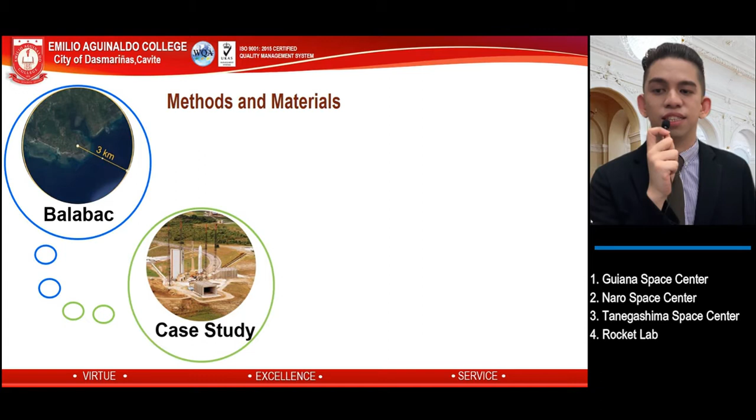The second part involved the case analysis of 8 existing spaceports, such as Guiana, Naro, and Tanegashima Space Centers, New Zealand's Rocket Lab, Baikonur and Plesetsk Cosmodromes, Pacific Spaceport Complex, and the famous Cape Canaveral Spaceport.

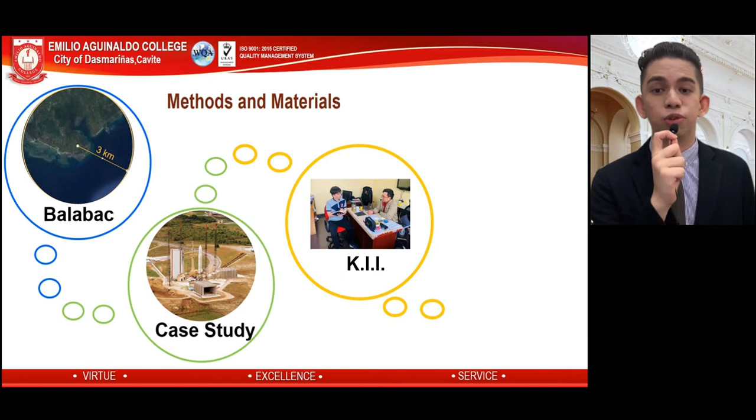Simultaneously, in the second stage of this study, I was also conducting key informant interviews and exchanging emails with the participants of the study. Using the method of triangulation, I processed the data derived from the first two stages of the study to come up with the design criteria, which guided me to create my spaceport layout design, in which I used a software called SketchUp Pro for my digitized model.

Now, let's look at the content of the study.

With my first statement of the problem - what makes Balabac, Palawan a suitable location? Findings say that Balabac is indeed a good location for the spaceport, except that accessibility will be a challenge since it lies at the southwest bottom of the Philippines, which means transportation of raw materials or payload will be challenging.

Moreover, the location is the best, unless it becomes a UNESCO site, in which case my study will then just become an essential reference for spaceport design located somewhere else in the country.

On recommendations, since this is a complex study, research like this would benefit if someone could make a comparative study about suitable locations within the Philippines for a spaceport. That would really help in terms of time, most notably for time-bound researches like this one.

For the second and third statements of the problem, such as queries on the design perspectives and design standards, findings can be summarized through this table.

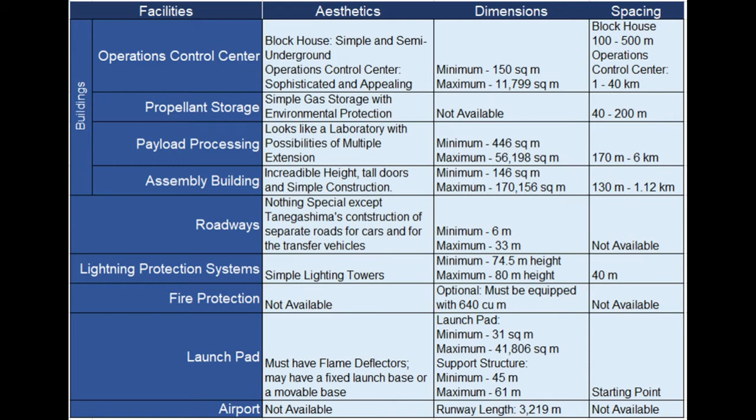Conclusions, on the other hand, state that comparison of active spaceports through case analysis is achievable despite the limitations in available references. I overcame this limitation by using Google Earth to see actual images of the spaceports, as well as to have reliable measurements regarding dimensioning and spacing.

Furthermore, I recommend that we follow design perspectives used by designers on studies like this, as well as published standards in textbooks and technical papers.

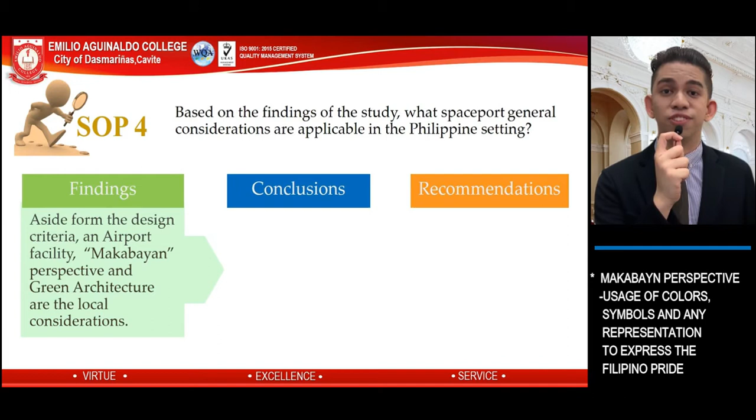For the last SOP, regarding the spaceport design general considerations exclusive to the Philippine setting, findings led the study to adopt into the design criteria three considerations. These are the airport facility to aid the accessibility problem as stated in the findings of the first SOP; the Makabayan perspective, which promotes the usage of colors blue, red, white, and yellow on the structural facilities; and green architecture, which will promote a good environmental relationship between the spaceport and the flora and fauna of Balabac.

With this, we can conclude that the triangulation method avoids bias when it comes to which response or data should be adapted.

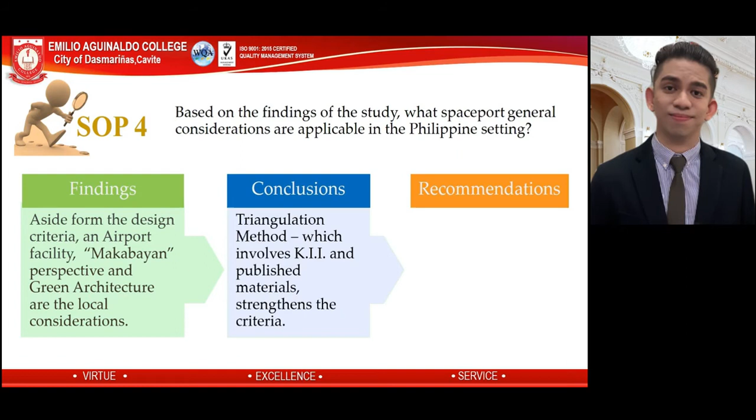The study recommends, on the other hand, that the use of simulation software can make a design's reliability better, learning from the inability of this study to use such due to its time frame. Moreover, the needs of the society in the location chosen for the spaceport design must be studied as well.

Let's take a look at the spaceport design.

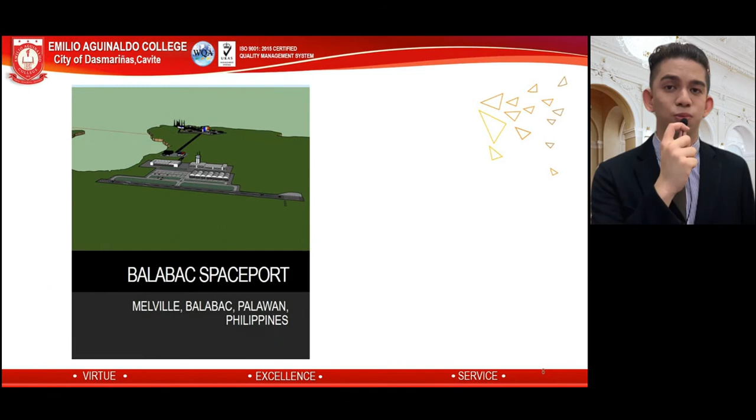Welcome to Balabac Spaceport. This is the layout plan on which the facilities are distributed on the landmass of Melville, Balabac, Palawan. Following the design criteria as presented earlier, the launch pad was designed to face southeast.

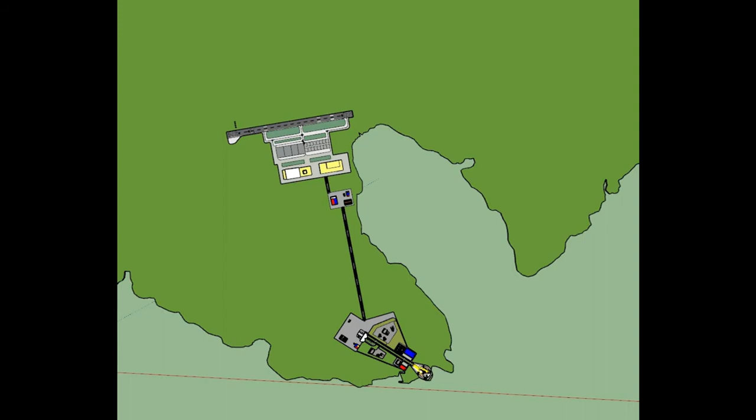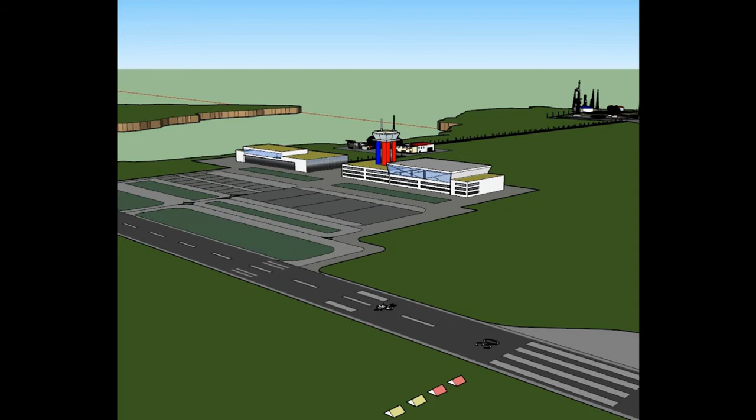This is the airport, and it has a runway length of 3,219 meters. With its control tower and the terminal buildings, it is expected to solve the problems with accessibility for a better spaceport operation.

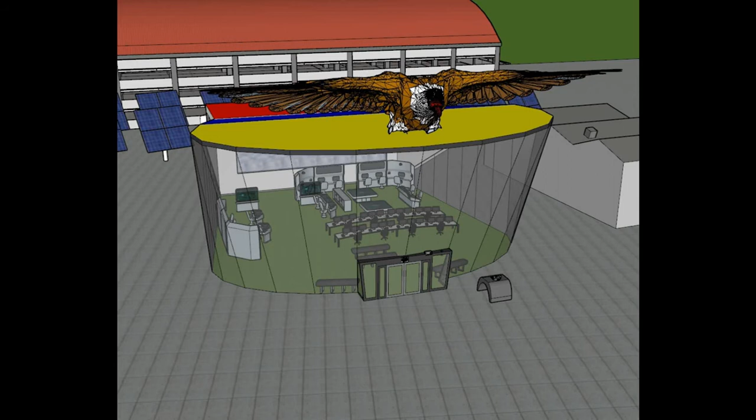This is the Operations Control Center. As the facility with the most sophistication in its design, it is characterized by its embellishment, which is the monkey-eating eagle, dubbed as the Philippine national bird. Moreover, it houses the launch control area, a reception area, and other compartments needed for the spaceport operations.

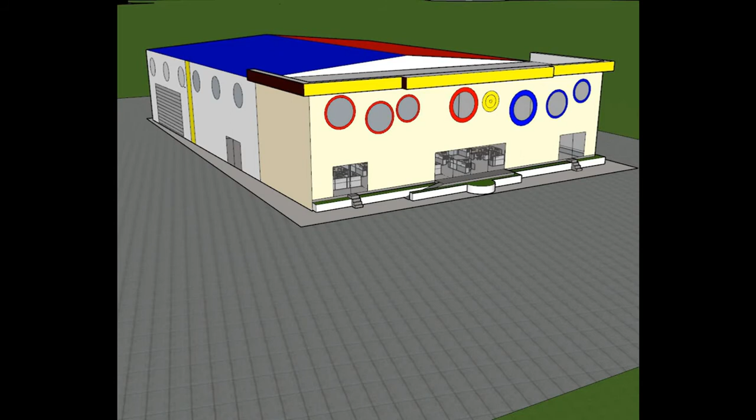With multiple compartments containing facilities such as the airlock bay and some offices, this is the payload processing facility. It is equipped with a gantry within its 10,403 square meter facility, located 1.5 kilometers away from the launch pad.

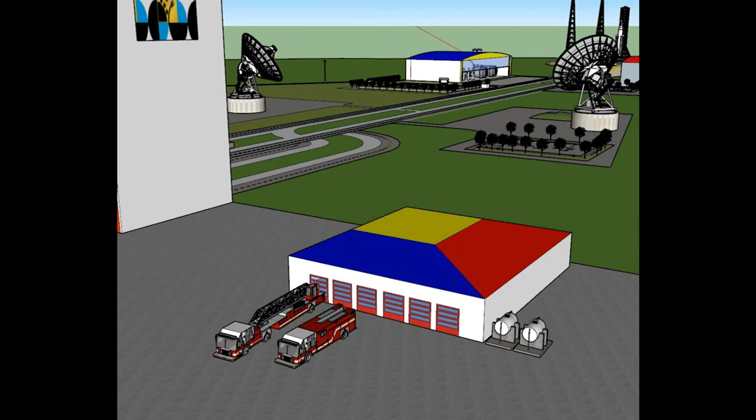The chosen fire protection for the spaceport includes a fire department within the vicinity. As can be seen here, just 500 meters away from the launch pad, roadways are strategized in a manner that the spaceport firefighters will have good access to the launch pad in case of fire.

The tallest structure in the spaceport vicinity is the assembly building. It can house two rockets at once with its two bays allotted for assembly of the payload and the launch system.

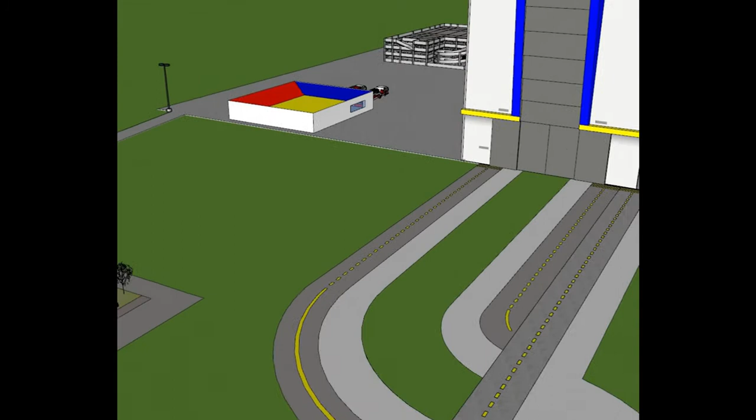Although a blockhouse may be considered optional, the researcher included such a facility in the design. Hence, as per the requirements, the blockhouse bore the flag colors and was semi-underground, as can be seen here.

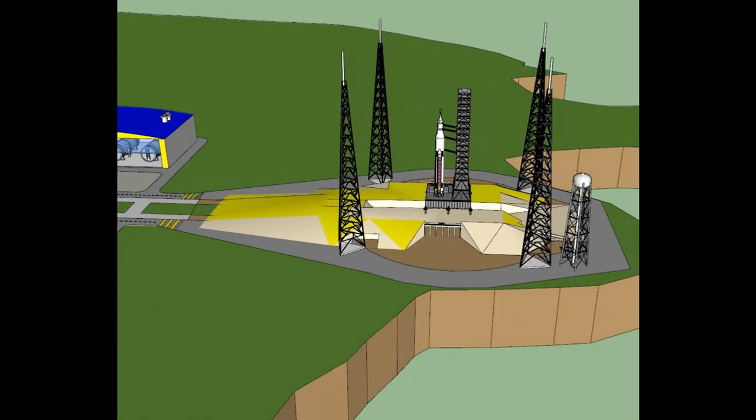Following Tanegashima Space Center's launch pad shape, the launch area shown here is equipped with flame deflectors similar to NASA's Cape Canaveral Spaceport, where the launch base is elevated and compartments beneath it where exhaust gases escape is visible. Furthermore, four lightning towers surrounding the launch pad are 75 meters high.

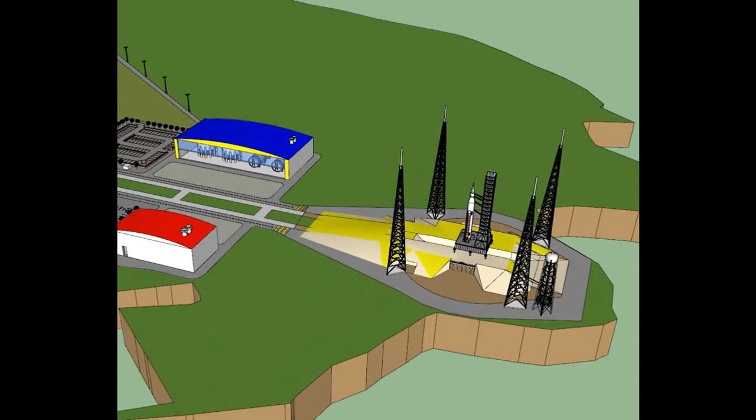The roadways here depict simplicity, while the visible adaptation of Tanegashima Spaceport's divided roadways can be observed.